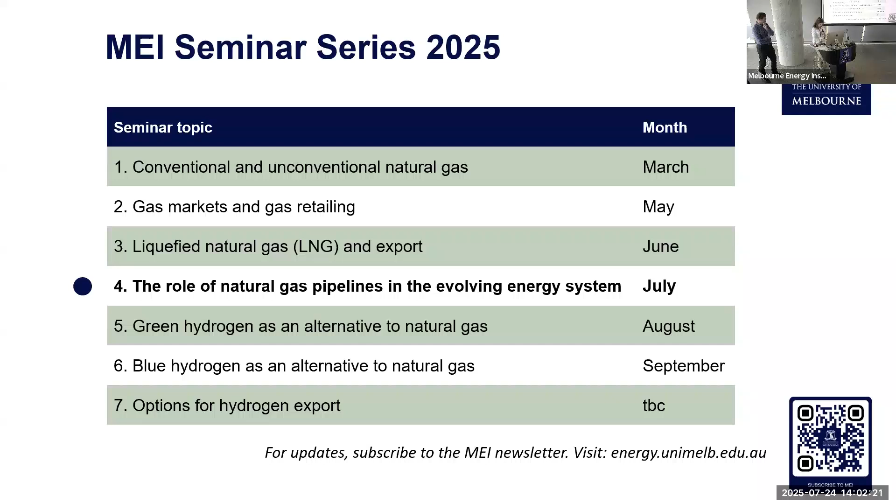Thank you, Franca, and thank you everybody for coming. I've been asked to first introduce myself briefly, and I will kind of put emphasis on the briefly to not distract from today's topic. But just as a run through my background, you will see it's got nothing to do with the topic that we're going to hear about today.

I really focus on simulating all kinds of fluid flows and thermal systems. I did my PhD in aerospace engineering in the States, mainly looked at how can you reduce drag of supersonic vehicles, but then spent 10 years in the UK, where we looked at how airfoils generate noise and how can you mitigate some of those noise generation mechanisms. That was really related to airfoil noise in aviation context, but also wind turbines. So that's more related to energy already, I suppose.

Since 2015, I've been at the University of Melbourne, focusing a lot on turbo machinery applications, so simulating flows in gas turbines, but also developing lower order models that are useful in the design iteration context. A lot of that work has been with industry and trying to improve design tools. But that's all I want to say about myself.

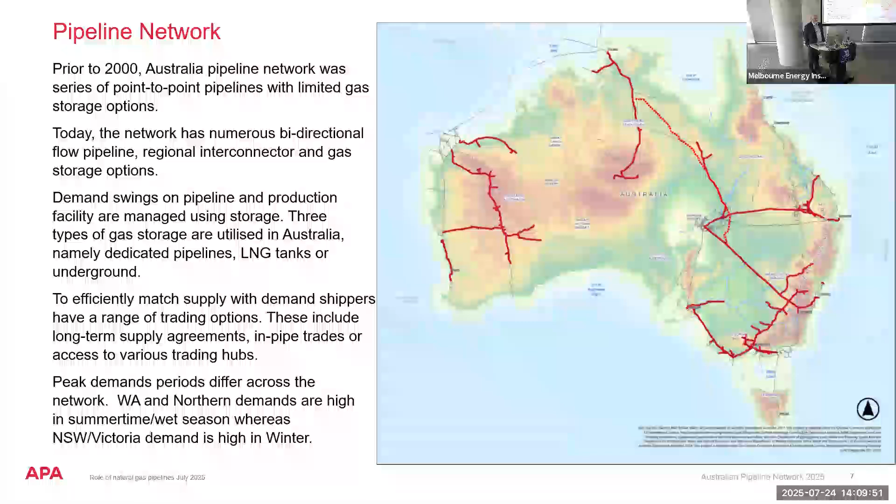But when it gets back to my business, peak demands differ across the network at different times of the year. If we're looking at Western Australia and the Northern Territory and even into Queensland, typically demands are higher in summertime. So we've got compression equipment that's working fairly hard, struggling to get air, and that's full load. Then on the flip side, when we're coming down into the East Coast grid, it's a winter-driven peak for us. You can see the extent of the pipelines and some new ones that we're proposing. So gas moves vast distances.

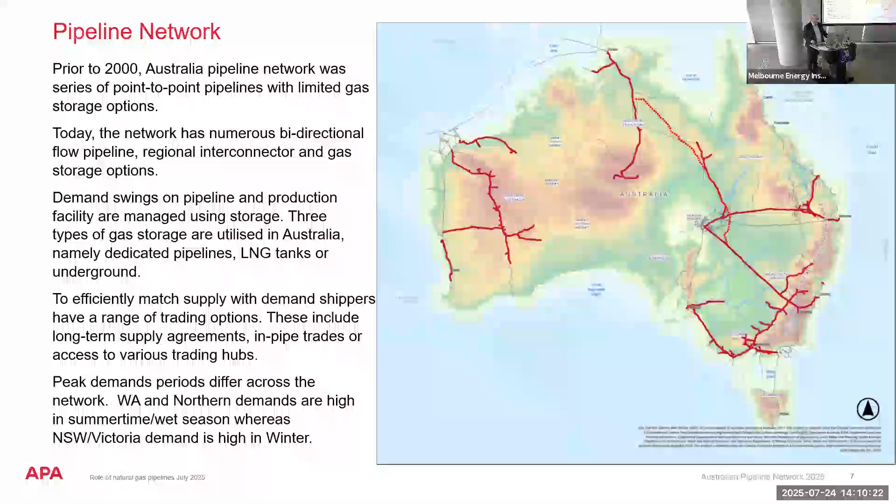So let's just put aside Western Australia. I could talk about that at length, but as I said, I'm going to work from a lot of data out of AEMO, but simplify it to some degree.

On the right-hand side of this chart, you can see a chart which is figure 4 in the latest gas statement of opportunities. I picked out the line that really shows how much production have we really got going on at the moment right now and forecast to have, and what storage. Then AEMO does a great job of layering and layering what options can unfold to show how the balance is met going forward.

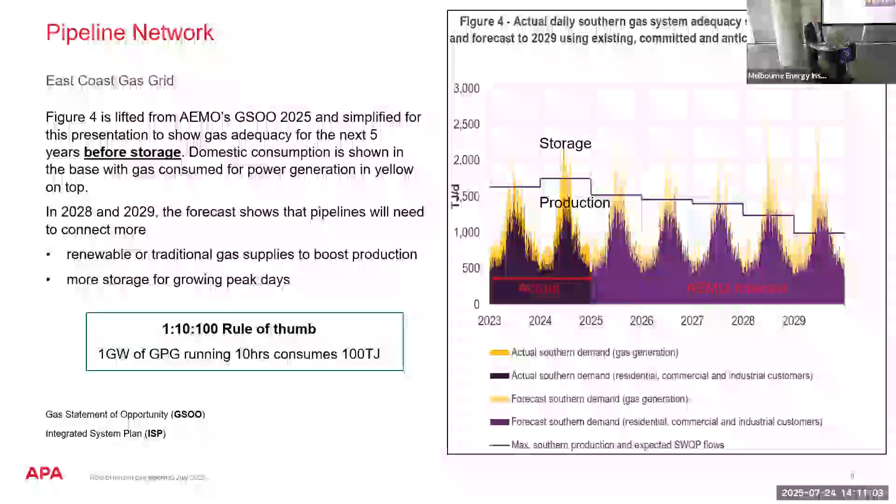That shows you there's already a mix of storage and production that meets the gas market. In other words, there's not enough production on any one day to just produce and service the market. You do need storage to run the business, and we'll need more storage going forward, potentially a mix of renewable gases, as there's a large opportunity to replace traditional supplies.

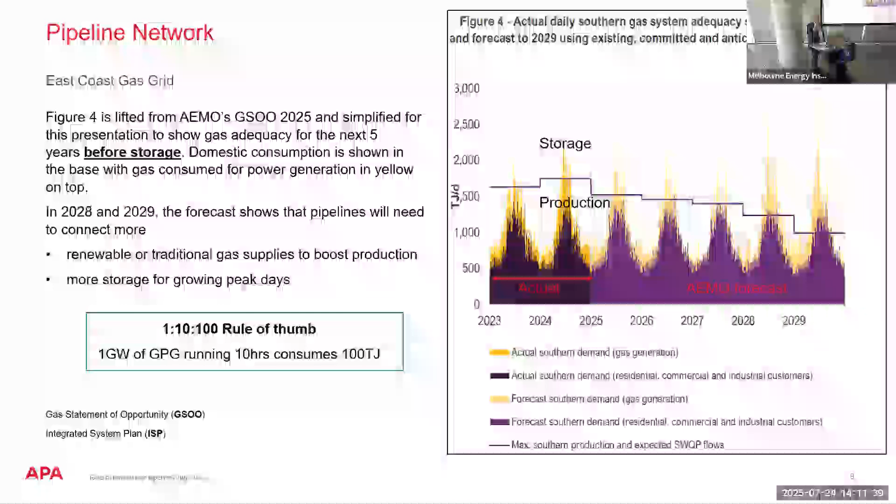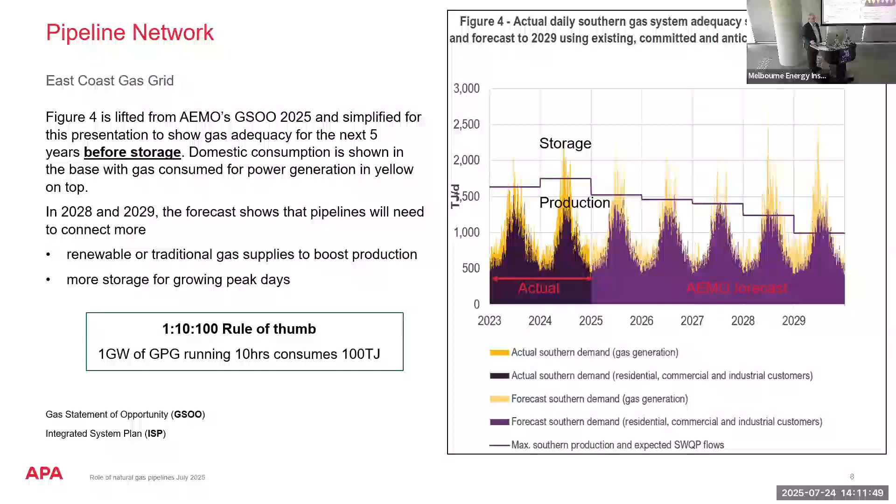The other rule of thumb I'll share is really easy to remember: it's 1, 10 and 100. If you're looking at a GPG, 1 gigawatt in size, and you want to run it for 10 hours, typically overnight or during a wind event, it'll consume 100 TJ. So you can see that we're looking at fairly significant electricity demands growing, and growing in terms of the network.

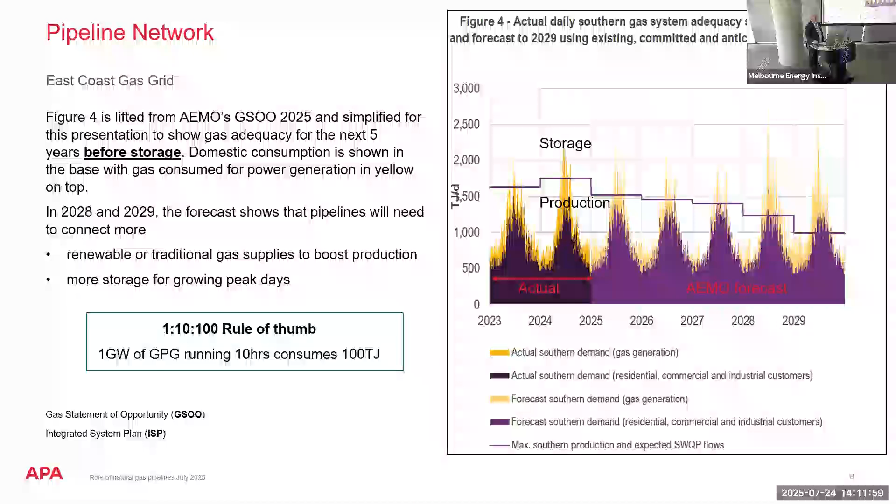So let's go a little deeper and look at some demand. I'll just take a little time here. So we spoke about...

This particular solution is just starting to operate up in New South Wales, but it shows how you can mix storage and a constrained network and still deliver some very large power station solutions.

So jumping forward, let's look ahead, and I'm going to look at the 5-year horizon because that's what most things take to build at the moment. If you're looking at a GPG, from the time you know what equipment you want to buy, you've got a 3-year lead time and a 2-year build. So it's a reasonable time frame to look at, and it's also in the planning horizon of where the market is.

The photo on the right, look at it - this is a pipeline 600 kilometres long in Western Australia, and it gives you an idea of how we cross vast distances with a single compressor, which I'll show you later. It just pushes gas from one end to the other. Here it's shortly after commissioning, so the right-of-way has yet to go back into nature, but they do tend to blend back in.

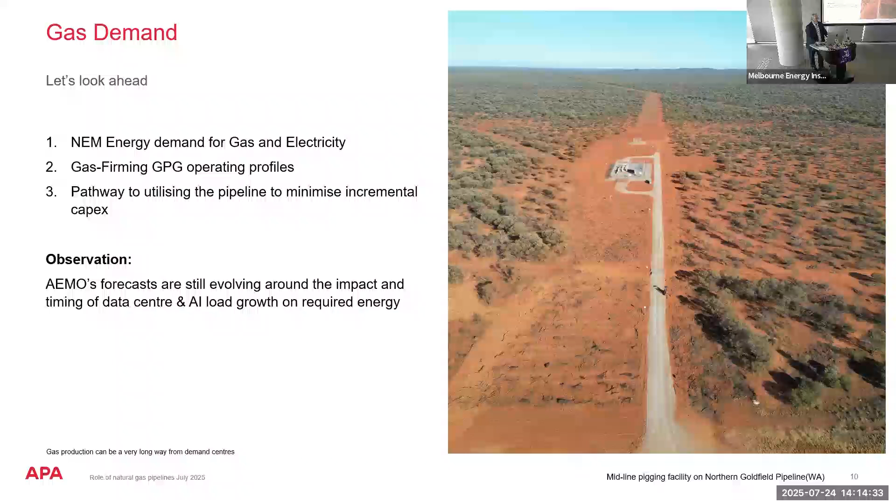So I'm going to duck into a fair bit on this slide - that's the reason for warning you on the previous one. Firstly, each of these slides looks 5 years ahead. I'm looking at a point, trying to say what's happening in 2031, '32.

Because if you wanted to start building GPG today, that's when we're going to see new load. We already see GPG running.

So what we can see is that gas demand is falling for domestic users - that's the first chart here on top - and it's projected to keep falling. The only scenario where it rises is if we were doing exporting, I think green hydrogen and export. But in all other scenarios, demand is falling, and we're already seeing that today. People turn on their air conditioner in winter rather than their gas system, so the loads are coming down.

What we see in the bottom corner here is the projections showing that peaking power stations will be running less often, but when they do run, they'll run harder. That's what AEMO's projections are showing. It's a bit hard to see, they're flat or less than before, but the peaks are higher.

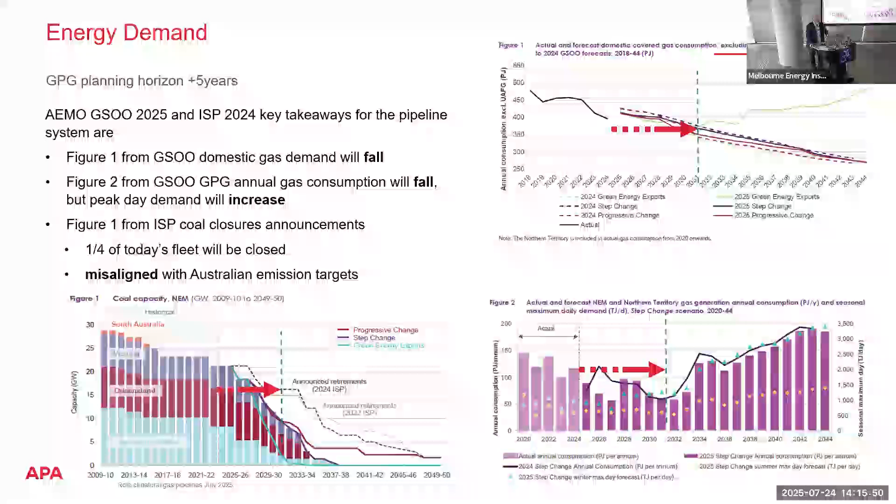The last thing I'll point to is that by 2031-32, based on announcements, a quarter of the coal fleet today will have retired, whereas modelling suggests perhaps half the coal fleet in Australia will be retired. So there's quite a bit of uncertainty from my point of view in terms of what I'm needing to achieve and how we're ramping up.

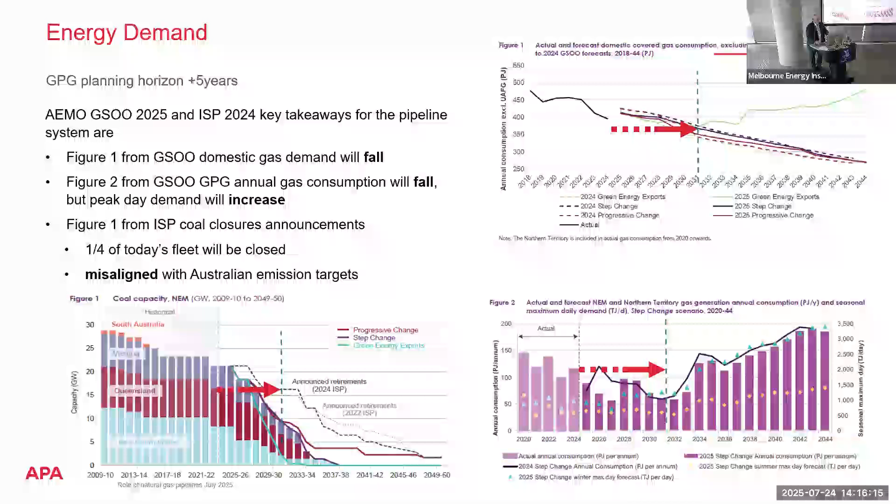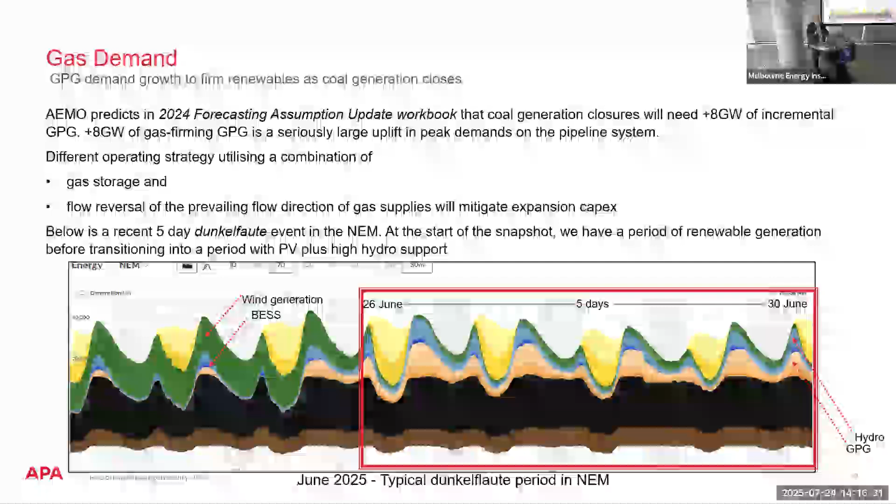Taking that further, in terms of those projections to cover the coal closures, AEMO's projecting there'll be up to 8 gigawatts. Now that 8 gigawatts isn't necessarily all at one particular time, but it's a growing GPG load, and the outlook is we're going to have some very high peaks.

So to meet those peaks, we'll need a combination of more storage, and we'll need to change the way the pipeline systems operate, and I'll explain that a bit further.

This chart I just grabbed shows our weather in the NEM, and this happens fairly regularly. We had a 5-day event at the end of June this year. You can see we had really solid wind, a bit of battery operation, a little bit of hydro, and quite a bit of thermal load behind it. Then we moved into a period where the wind just backed off.

So the hydro swung in and ran up to its maximum capability, helping out immensely through there. The wind was sort of missing, the solar wasn't as strong either - it's still pretty solid there, but not as strong. And there's been an awful lot of fossil fuel.

So closing the brown and black area - brown coal, black coal - what's going to support us through this 5-day period? Because that's what we're looking to solve, and it doesn't happen all the time. It might be quite a few weeks before it happens again, but then it happens again, and there's a repeating pattern of what to do when the renewables drop off. Hopefully that example illustrates it, as I said, it happens fairly regularly.

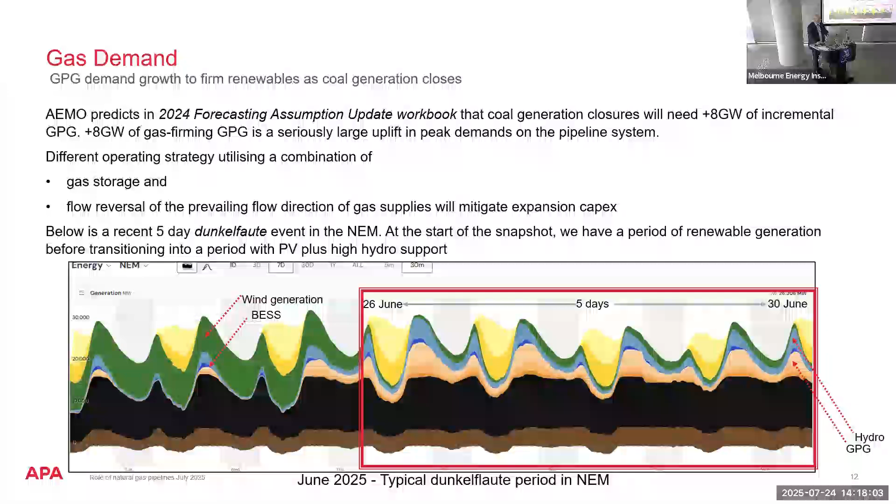So what do you do with a gas pipeline network to meet these huge loads? What I've done on this slide is show a hypothetical new power station being built, say somewhere near Canberra for this particular example, but we can play this many ways. I'm just showing the prevailing flow directions as we go forward.

So we're looking at some Beetaloo gas joining through the existing networks coming in. We'll get some Queensland gas coming across at the top, and then flows coming down into Adelaide through SEA Gas, through EPIC - remember the Adelaide system - and then SEA Gas flowing back into Adelaide. Flows coming down through Moomba Sydney and branching off either into Victoria or into Sydney. And then Longford itself producing gas into Melbourne and also up through EGP into Sydney.

On this part of the page, I've taken the arrows off because I wanted to show you what happens when you suddenly get a huge load and how those flows change. So before I do that - gas moves in a pipeline because you have a high pressure and a low pressure. If I want to go from this side to this side, I have high pressure here and low pressure there.

So in the case of Young, if I'm going towards Melbourne, Melbourne's taking gas away, so I create a high pressure at Young and it flows down to Melbourne. When I want to go the other way around, I need to create high pressure in Victoria and go north, so the pipeline will flow the other way. What it means is that load which was going there can now go to another point on the system.

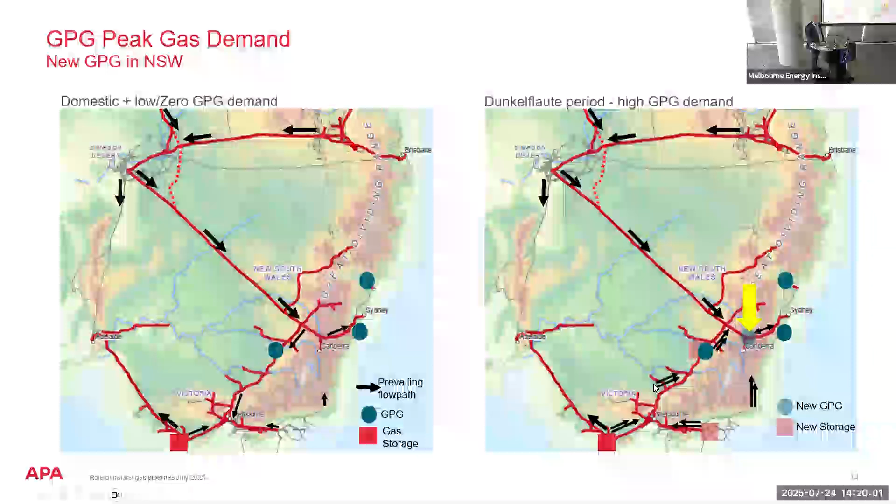So let me just step forward. If you have underground storage - say Golden Beach, but it could be other operations - then you can increase the volumes coming out of this part of the network, and that frees up molecules to both service Melbourne and also push back up into New South Wales.

Similarly, it could push back up into New South Wales. Gas that had been flowing down the New South Wales to Victoria interconnector can flip around, and therefore you get two lots of gas arriving at the top. So you can quickly double the volume of gas going to a power station.

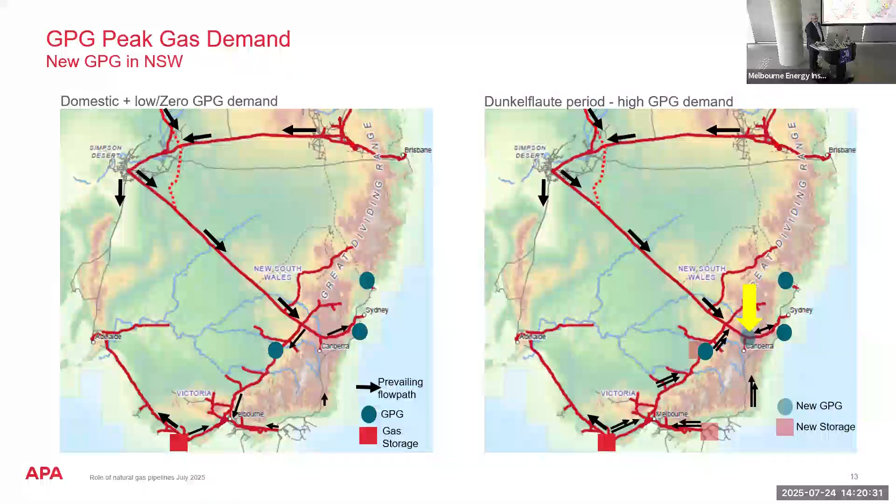You can't sustain it forever, that's why you need storage. It'll last 4 or 5 days, the weather comes back, the renewables are in, and then away we go again. But underground storage is a lot bigger than a battery.

So what we're looking at is an outlook with fields that have been producing for 50 to 60 years are in decline. There's further work going on in expanding and drilling those fields to extract more useful life out of them. We're also looking at alternative gas production that needs to be added, whether natural gas from underground sources or renewable gases.

When you look at the Gas Statement of Opportunities, it highlights that we have enough domestic gas to supply ourselves till 2033. I'll talk about that on the next slide.

Whilst LNG imports are technically viable, it does tend to support that it'll be higher cost of gas. And as Paul Simshauser has shown before, there's a link between the cost of gas and ultimately the cost of electricity.

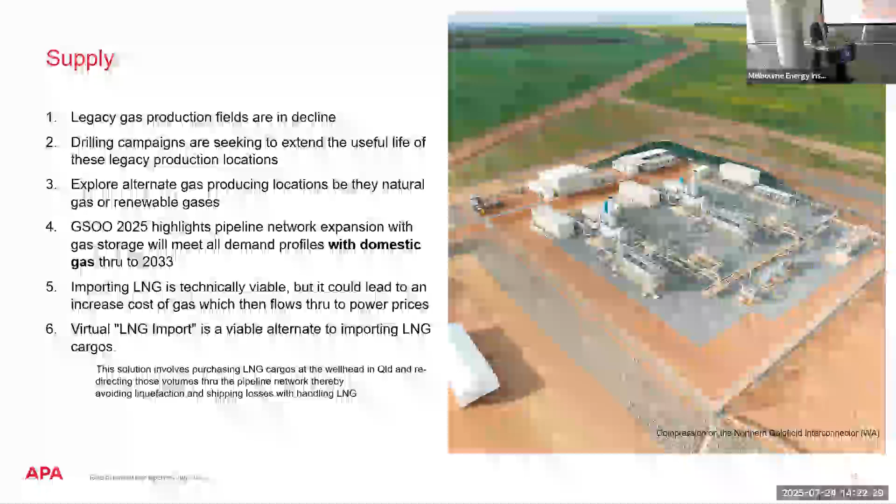So we do need to be mindful about which pathways we go down. The other thought I had around LNG imports is that we're already producing them in Queensland. So buy the cargo off the producers already and redivert back through the pipeline network, saving the liquefaction and also the shipping losses that go with moving the molecules around by boat. It's a way of extracting better value from our existing LNG in a virtual pipeline, a virtual LNG import arrangement.

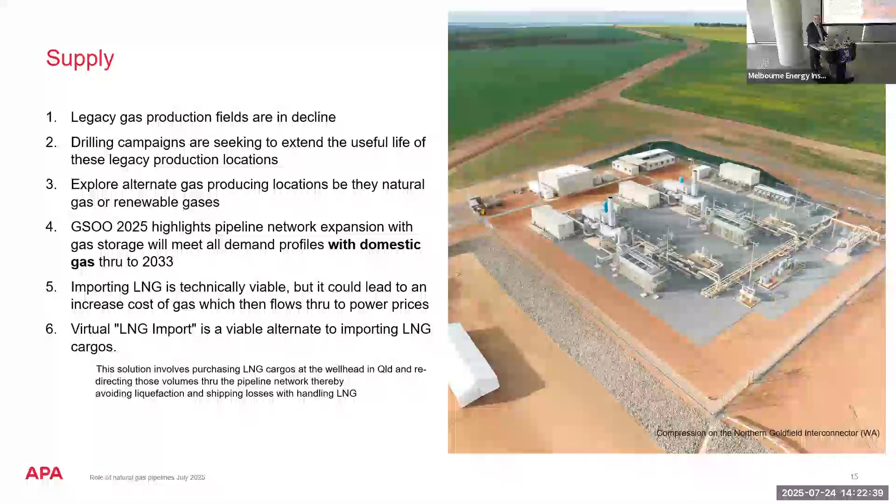So I mentioned that AEMO flagged that we don't need, we have solutions in front of us in terms of just modifying our pipelines and connecting different gas sources that take us out to, these are AEMO's words, 2033, 2034. You can see it in the chart on the far side where they show no additional supplies or gaps through this period, as long as the pipelines are augmented.

And then they've got a very busy chart down here. I won't seek to explain it here, but what it does is look at gas production from fields and then overlays the amount of storage and whether it'll cover the period that it needs to supply. It's a great piece of work, and if you want to read more about solutions, AEMO covers that in section 5 of the GSOO. This work is something I've been working on and sharing with them, and different strategies about moving gas around Australia.

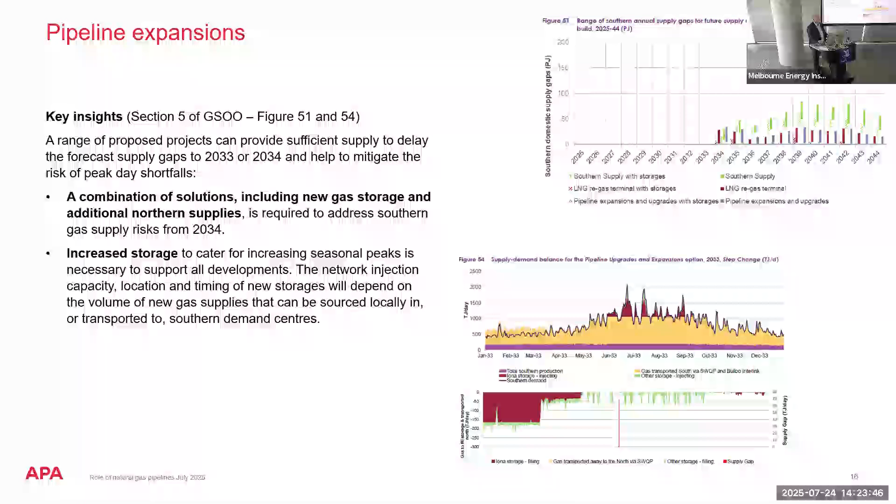How does that look in terms of our pipeline system? So we're currently sitting in terms of moving gas from Queensland, which is a large potential source of gas, further south through the Moomba Sydney pipeline at around 560 to 580 TJs a day. We don't often operate up at those levels. It's typical Southwest Queensland can get up to these levels, but Moomba Sydney hasn't moved all of these sort of numbers. So demand is still growing, but there's headroom available in existing pipelines.

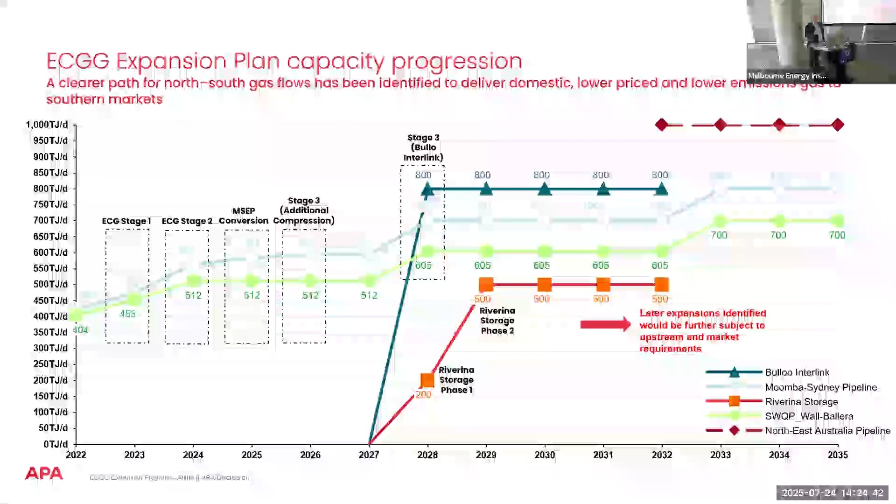And then we've got a series of staged expansions which will add circa another 300 TJs. And this is just baseload gas, the idea here is just to move it every single day and fill storage. Then the storage has the opportunity to handle the swings, and so you get this doubling effect. Similarly, if I trace Southwest Queensland through, when we do this expansion with the Bulloo Interlink, which you saw the dotted lines earlier on my map, it gives us another 20% expansion across that system.

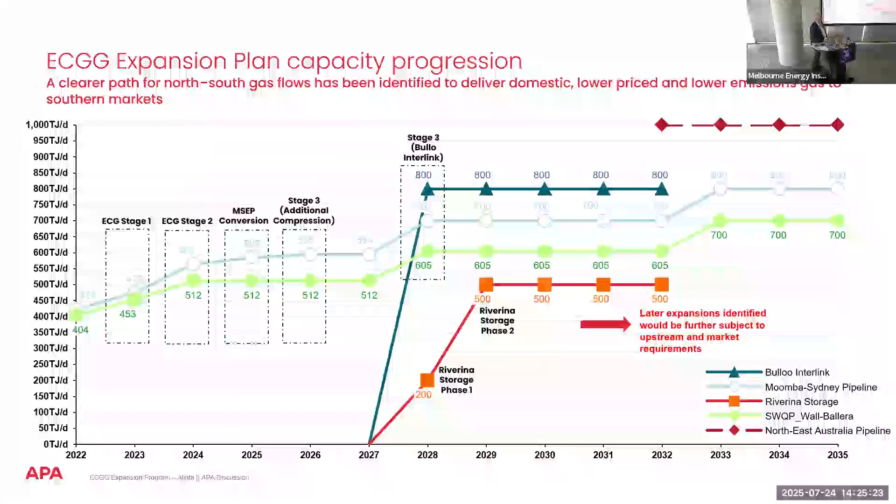And then we could also put some more additional compressors on there and take it up another large proportion. The other element that I think we need in the East Coast grids is localized storage, just to reinforce if we have an issue, an underground storage facility. We need to have multiple options, and so some dedicated storages, like I showed earlier on in the story there at Kurri Kurri, probably larger than Kurri Kurri.

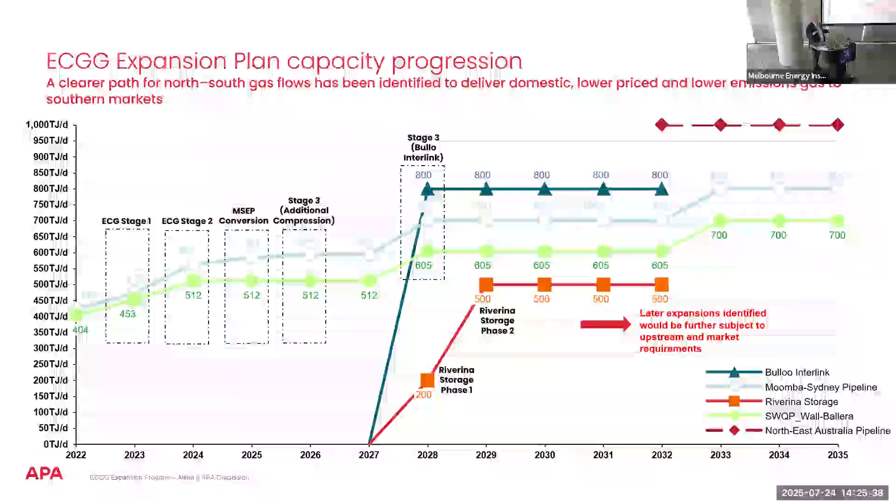It's only built for one power station. You need to carry the New South Wales and Victorian loads. So a phased expansion of Riverina storage would then provide the right balance and mix of short-term assets and longer-term assets.

So I'll get to some closing thoughts and change theme a little bit. I just want to talk briefly about net zero.

APA's had a climate transition plan. It was a challenging first write. I think once you've got something, you can always read it and go, oh, second time around - I suppose it'll be the same when we sit down with Net Zero Australia. We'll have some feedback and some learnings, and that will certainly be tweaked. But we published it 3 years ago, so we're having the chance to reflect at the moment and see what we've done. In our document, we're going to have quite a few stats, and we're going to talk about insights that we've learned in the last 3 years in terms of the journey to improve our emissions footprint.

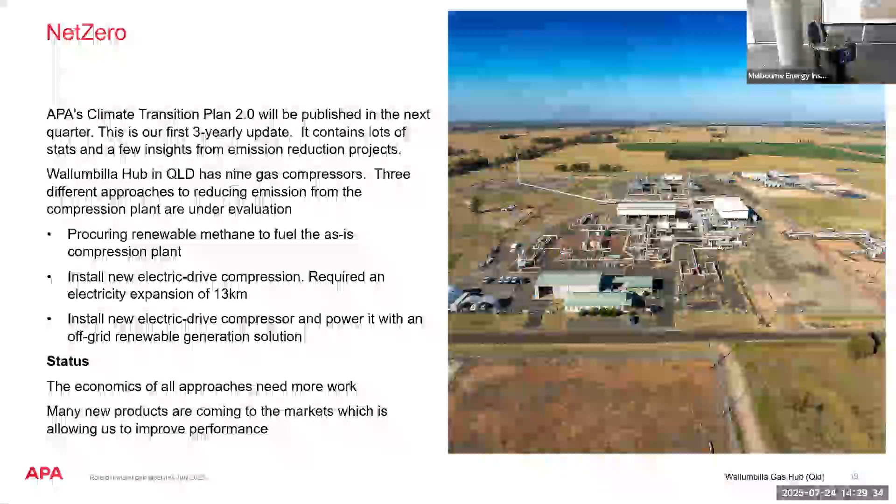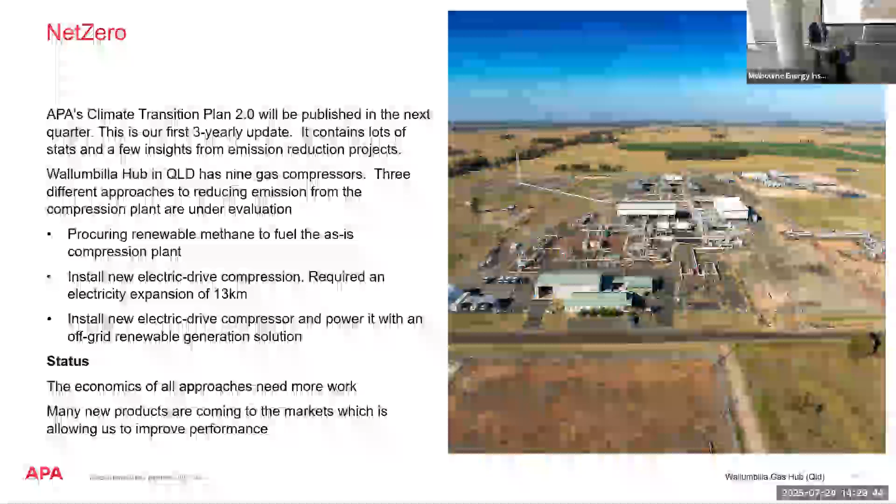We'll try and do it proud. But the Pipeline Association's been at it for about 60 years in terms of research, and we'll continue to do so. So with that, I'll close up.